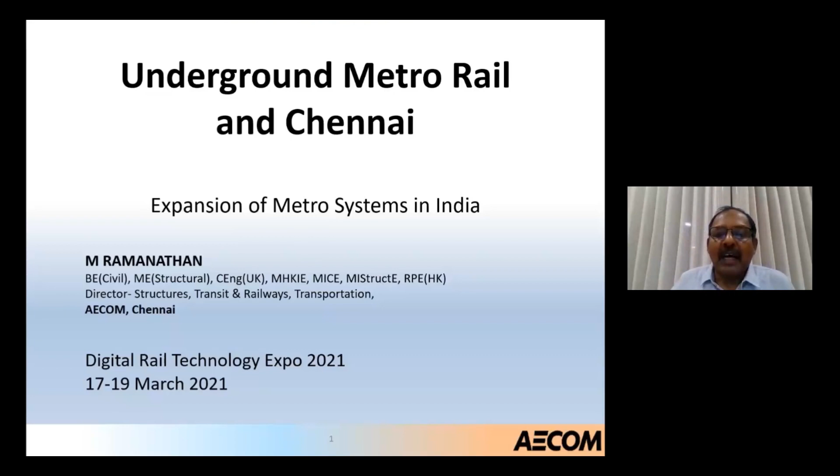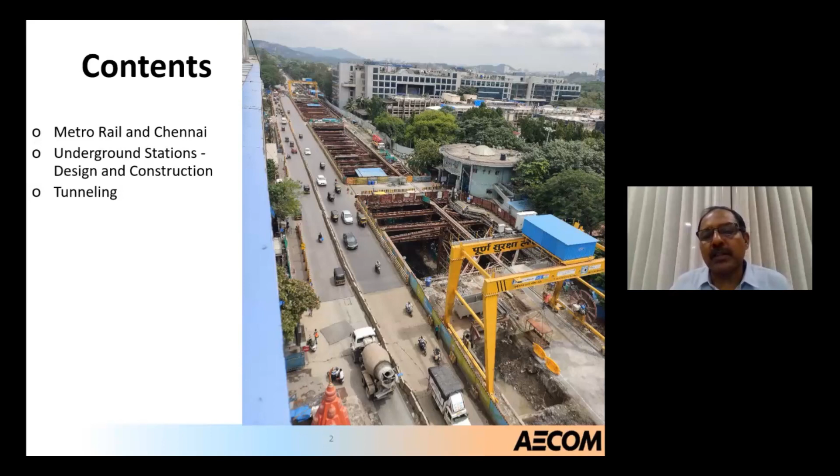I have divided today's presentation into three parts. The first part is about metro rail in general and the city of Chennai and its metro rail. The second part is underground stations, why we should go for underground, and what are the merits and demerits. The third part is tunnels. Underground metros have stations at regular distances of about 1 kilometer, connected by tunnels, so we'll talk about tunnels as well.

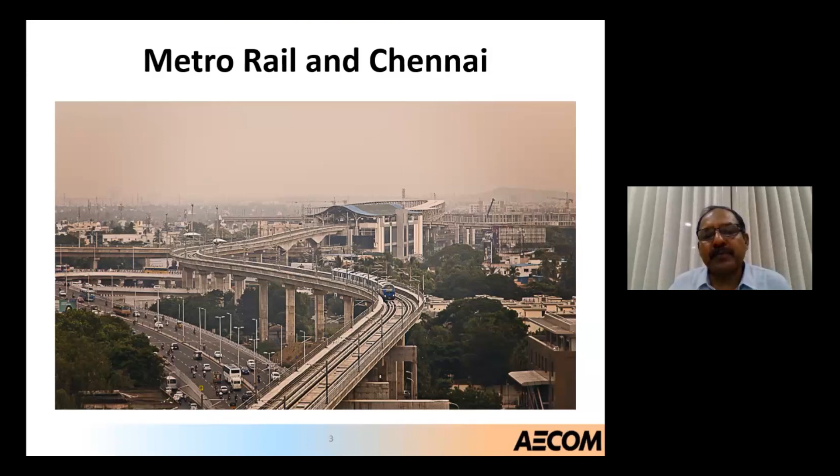The first part is metro rail and Chennai. Let us go through how metro rail is different from the normal intercity railways, since we have been using intercity or mainline railways for a very long time. But these metros have only picked up in the last 15 to 20 years in this country.

Let us brush up on the basic differences. The metro rail, by name, is clear it's only in metro cities, and it's used for mass transit. In Chennai, there are 4-car trains, as you see in this picture. A 4-car train is capable of transiting 1,276 commuters at a time, whereas even a bus in this city can take about 70 people, 40 seated and 30 standing. So you can imagine how many buses we would need to replace a single 4-car metro train. That is why it is used for mass transit.

Another feature is that the stations are located very close, normally 1 kilometer apart. The idea is that anyone along the alignment in the city, by walking not more than 500 meters, should be in a good position to board a train. In metro, we use standard gauge. Indian Railways were originally running on meter gauge, as the name indicates, where the distance between the two rails is 1 meter. This has been replaced by broad gauge now, which is more than 1.5 meters. The standard gauge is something between meter gauge and broad gauge; to be precise, it is 1435 millimeters.

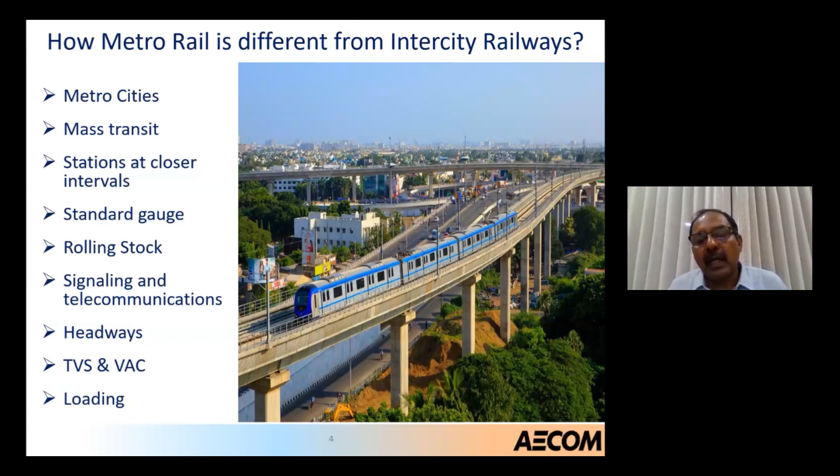Another aspect is TVS, or Tunnel Ventilation System, and the ventilation and air conditioning system. These are all new and specific for metro rail operations, and the loading of metro rail trains on the rails is also much different compared to broad gauge mainstream railway.

Now the merits of metro rail: it consumes very less energy and is more reliable. There will be no traffic jams, so it is punctual, has lesser noise level, and is very comfortable. Travel is in air-conditioned coaches, so the commuter will not be subjected to heat and other inconvenience, allowing him to go to his workplace in a good mood.

The capacity can also be augmented. For example, as seen in this picture taken from the Chennai Metro, it comprises 4 cars but has been designed for 6 cars. The stations, signaling, and telecommunication are all designed for 6 cars. Since these systems are designed for a long period, 120 years of design life, it can be augmented to 6 cars whenever required.

The journey time is reduced and it's faster, carbon emission is less, and it carries the same traffic as 7 lanes of buses and 22 lanes of private cars. So there are a lot of merits to going in for metro rail.

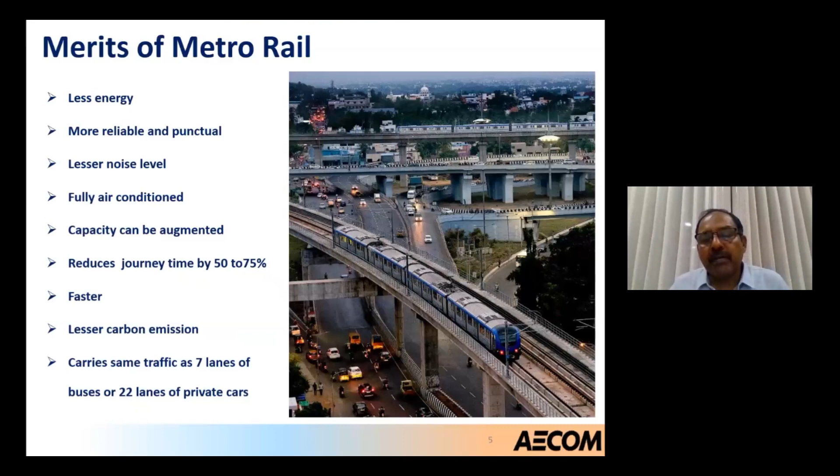Now coming to India, metro rail has been very popular all over the world, but in India it started very late. Actually, the Calcutta Metro started very early, as early as 1972, but the method of construction used was not very modern. It was an underground metro.

In those days, the communication and interface between various government agencies and utility companies were not very good, and all that delayed the Calcutta Metro, subjecting people to a lot of inconvenience. In 1984, after 12 years, they could complete and inaugurate only 3.5 kilometers of underground metro.

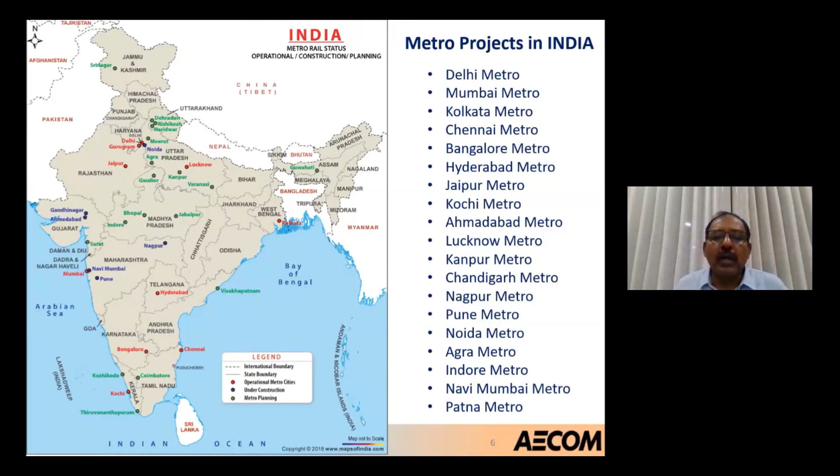Later, the Government of India and the Ministry of Urban Transport also allowed second-tier cities to have metros, and most of these second-tier cities went for elevated metros because that can be constructed very fast and is relatively cheaper than underground metro. So many second-tier cities — Kochi, Jaipur, Ahmedabad, Lucknow, Kanpur, Chandigarh, Nagpur, Pune, Noida, Agra, Indore, Patna — now have metro rail constructions going on. So the metro system has well taken off in our country.

This is a map of Chennai Metro.

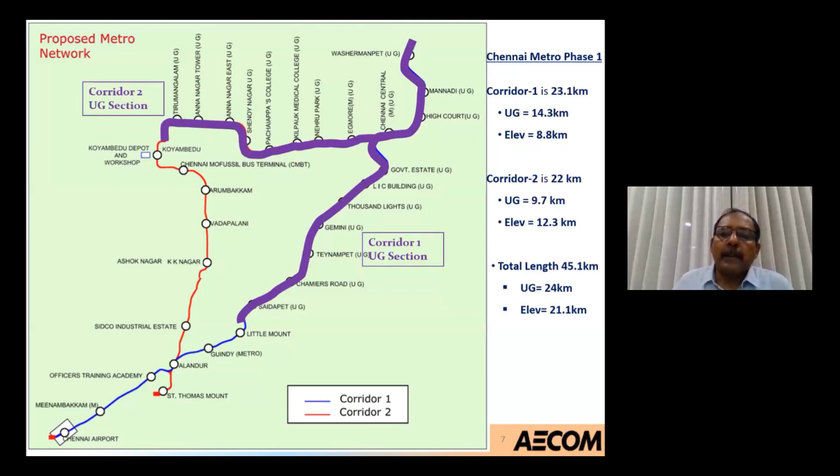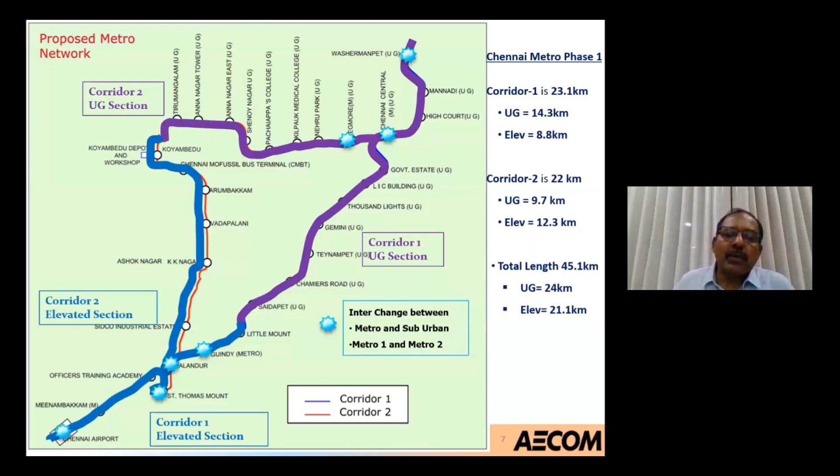I'm going into the details. This is the first phase, which commenced in 2009 and completed in 2016, but in between it's done in phases. So this total 45 kilometers, out of which nearly 50% is underground, shown in the shaded purple line, and the blue color is elevated. So there are two corridors.

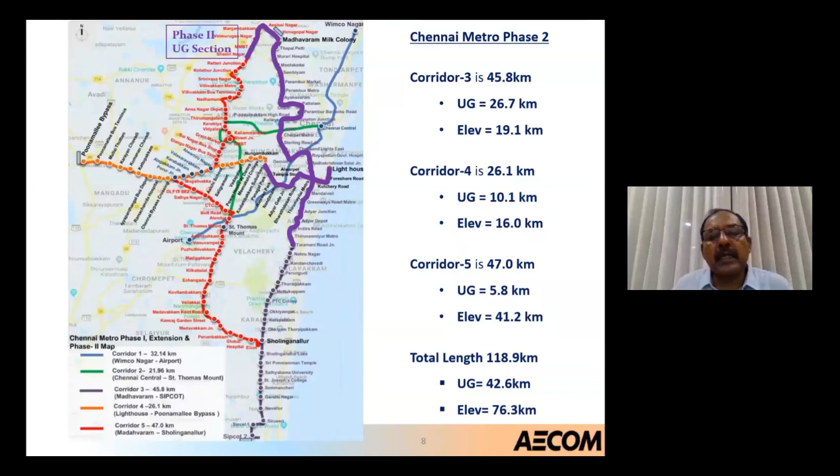So this total 119 kilometers has been divided into 17 civil tenders, and all the civil tenders have been launched. 2 of the tunnel tenders have already been opened, and the other 15 tenders have been launched. So what has now been shown in the purple thick highlighted color, one is the underground, and the remaining part is at different stages.

The detailed project report for phase 2 was completed in 2015. The geotechnical investigation, which the client themselves did, was a very expansive geotechnical investigation completed in 2018. The detailed design consultant, AECOM, is doing the entire corridor 3. The other consultants are doing corridor 4 and corridor 5, and AECOM is also doing part of corridor 4.

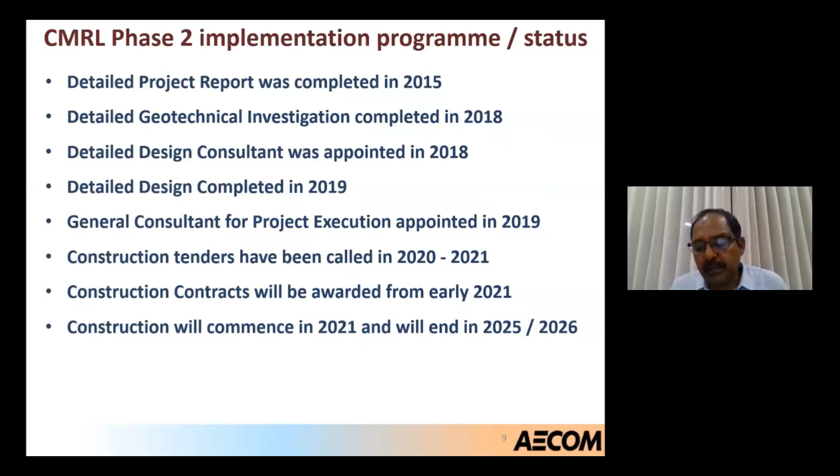So these are the detailed design consultants. They were appointed in 2018, and detailed design work was completed in 2019. A general consultant for project execution, that is construction supervision and contract management, was appointed in 2019. Tenders are floated in 2020 and 2021, construction contracts will be awarded starting from 2021, and the works will be completed in phases between 2025 and 2026.

Before going to the underground, I just want to show a 3D view of an elevated metro along OMR. What is OMR? It's Old Mahabalipuram Road, the road from the city which leads to the historical place called Mahabalipuram, where Prime Minister Modi and the Chinese President Xi Jinping met 2 years ago. So this is that road, a famous road of the city, called Old Mahabalipuram Road.

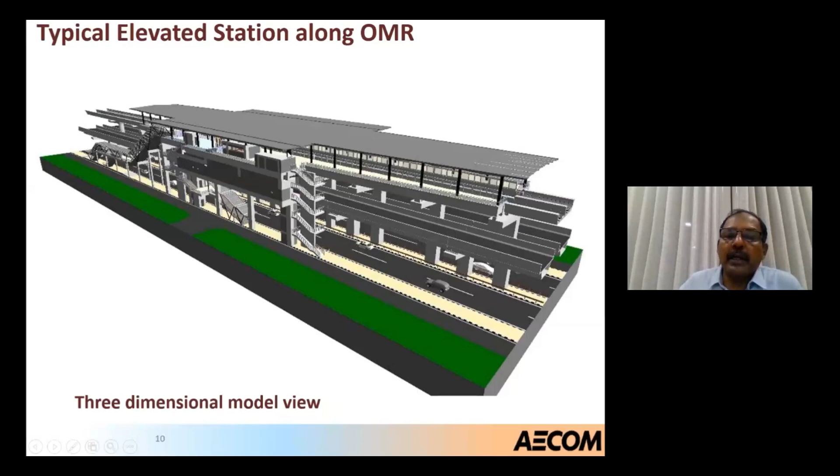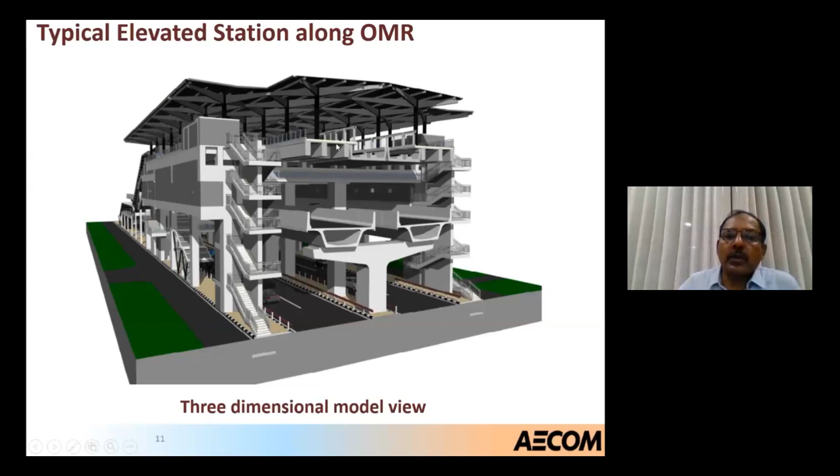You can see there is a viaduct below. This is a proposed elevated road, and the metro rail train will be running above. This is another cross section, a closer view. So this is the existing Old Mahabalipuram Road, now called Rajiv Gandhi Road, and this is the proposed elevated viaduct, and this is the station side platform. The platforms will be opposite to each other.

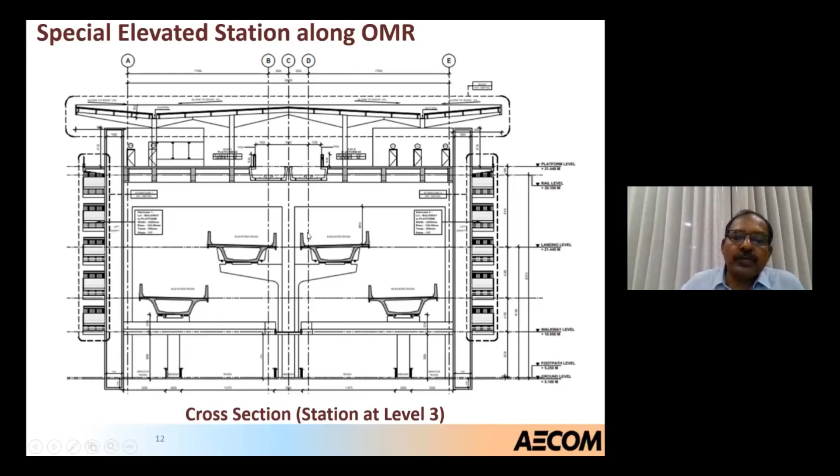And here is another place where there will be 2 decks of elevated viaducts. One elevated road and another one at a junction where there is going to be a flyover, and over which the stations are constructed. So all provisions, the station will go first, but provisions will be made for the elevated road, which will come later.

And now I go into the underground stations. So this is a typical underground station, where you can see a big box constructed below ground with tunnels on either side.

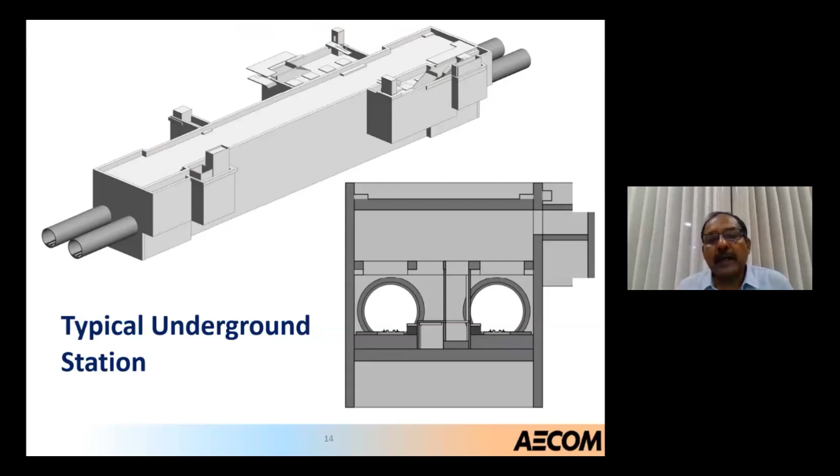So underground metros are there everywhere, all over the world. The London Metro, popularly known as Tube, is the first one, which started in 1863, and now it has more than 400 kilometers of metro, with nearly 270 stations, and on average 40 lakh journeys are performed every day. Paris Metro followed in 1900, New York Metro also in 1904. US is not very popular for public transport, but the city of New York has this subway, which is very popular, and it has the maximum number of stations all over the world, nearly 424 stations in New York. Tokyo Metro came in 1927.

Moscow, actually, it is a piece of what I would say - every station has been constructed so meticulously, like a museum, with a lot of heritage value.

Because of this communist policy and the Iron Curtain, many people did not know about the developments in Moscow for long. So anybody who gets an opportunity should visit Moscow Metro.

Beijing Metro started in 1969, and all over the world, there's a maximum number of people who use metro in Beijing, nearly 1 crore journeys per day.

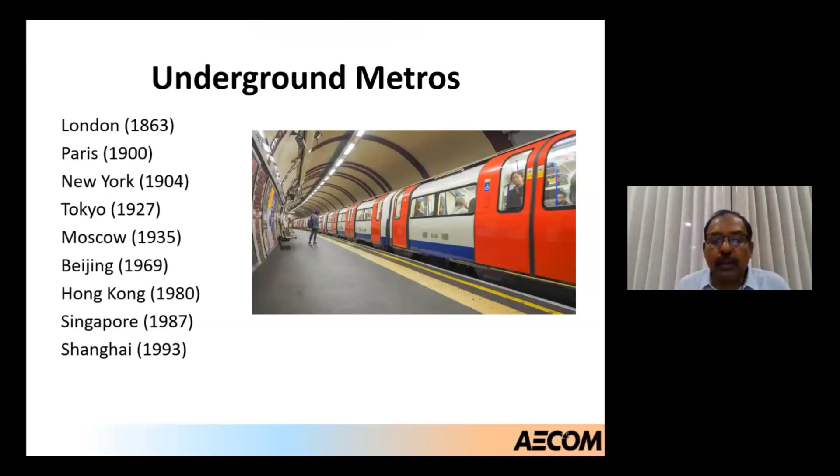Now, all over the world, people use underground metro. Why should they go for underground? As I said before, in India, most of the second-tier cities and even the first-tier cities go for elevated.

For economical reasons, the cost is less, and the inconvenience to city citizens or city dwellers at the time of construction is relatively less in elevated metro. Underground is a bit of a nuisance during construction, and it is expensive and takes longer time. So that is why our people mostly go for elevated.

But why do all the major cities all over the world go for underground? Because the underground metro is more sustainable. It does not damage the configuration and the landscape of the city.

I can compare the Mount Road of Madras or Chennai and the MG Road of Bangalore. Now MG Road of Bangalore has an elevated metro, meaning the landscape of the city along MG Road has totally changed. You have an eyesore sort of viaduct in the middle of a very important road of the city. Whereas on Anna Salai or Mount Road of Chennai city, which is the lifeline of the city, all the metro stations are below ground, underground.

So whatever structures, road width, commutation, passengers, all the heritage structures are preserved, because it is a city with a lot of history.

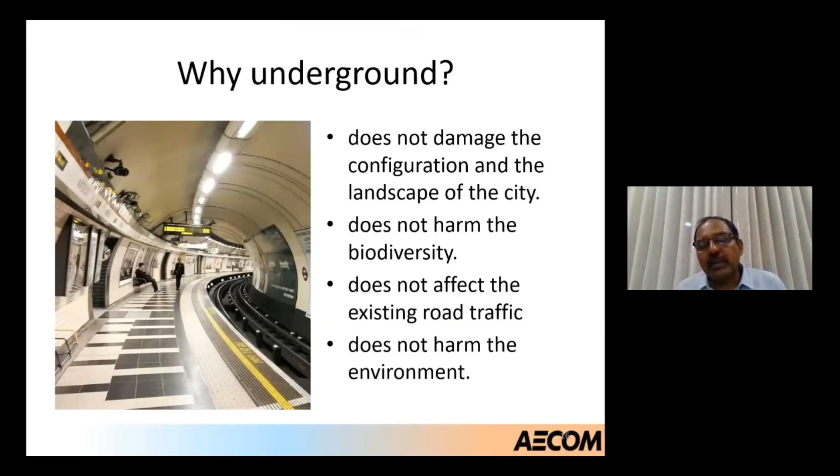Otherwise, they would have been traveling in buses or cars or scooters above the road. So all their carbon emission is now saved. Since they go below ground, it is not harming the environment. These are the broad advantages of underground.

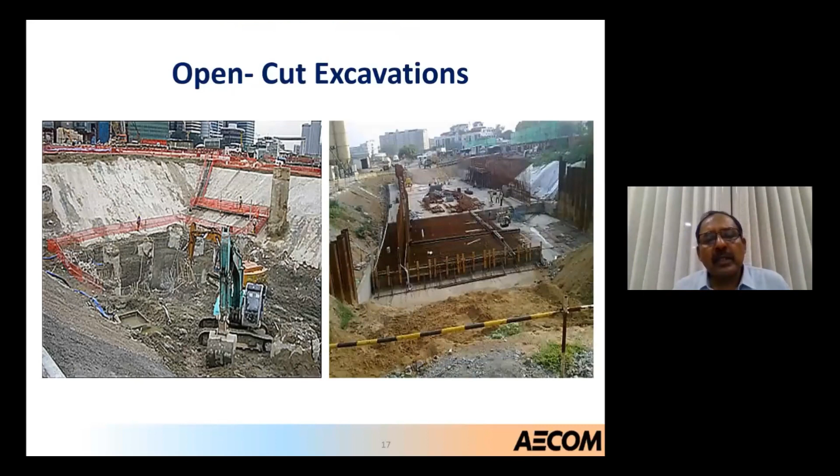Now I'll quickly go into the construction techniques. Underground, if the soil is good, you can go for open excavation, but not in many places. In places where the soil is loose, you have to use some shoring system or other system. A shoring system is a temporary vertical support to support the excavation.

In places like Delhi, in the top portion you don't need any shoring, but below you do. Mumbai is also the same. In places like the Middle East, the soil is such that you don't need anything at all, you can just go down 25, 30 meters without any problem. But in Chennai city it's not very advantageous that way.

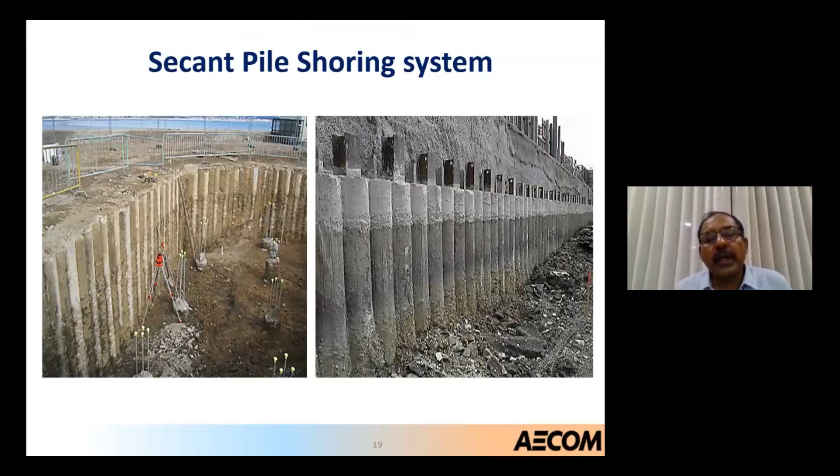So we use something called a diaphragm wall, because the water table is very high. It is not economical to use a temporary shoring system. It can be used, but instead, a diaphragm wall, which is a concrete wall, is constructed.

It is constructed by something like a bore pile, by pouring concrete from the top. It will be used as a temporary support during the construction stage, where you see a lot of steel struts longitudinally and in the transverse directions.

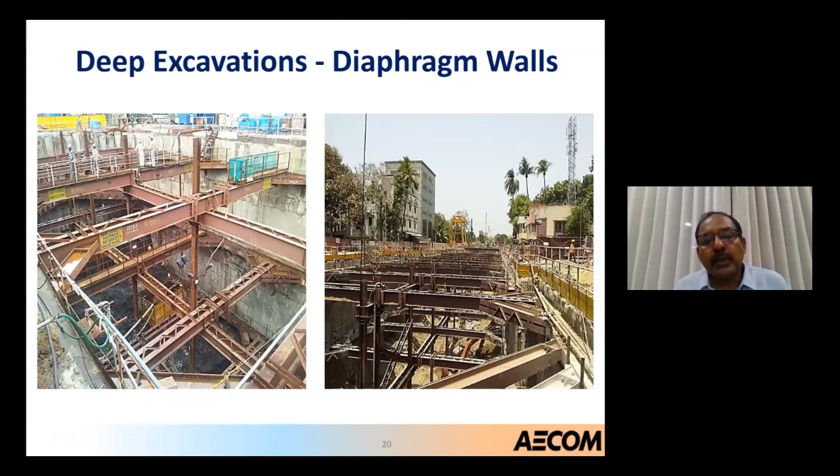But once these are all removed, this diaphragm wall, which is built for temporary use, will become a permanent support. Here is another view of the diaphragm wall, where you can see the steel struts.

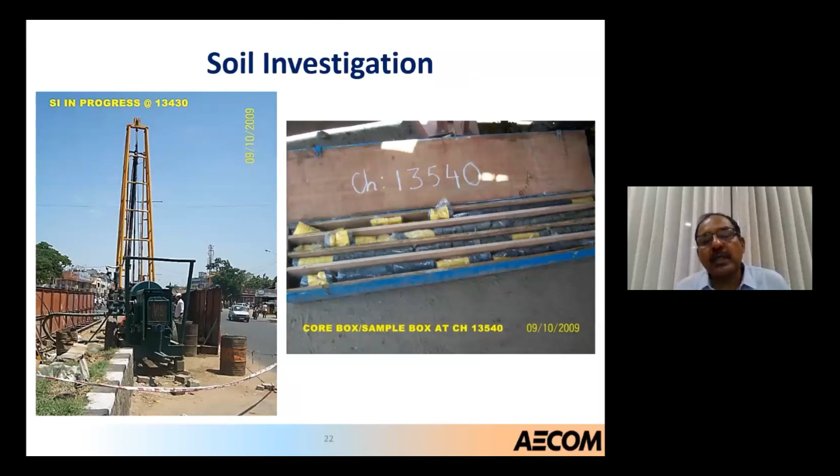We have to do an extensive soil investigation to understand the soil conditions, go 30 meters, 40 meters below ground, take samples, and geologically design your diaphragm wall and the bore tunnels. That is a very important part of underground construction.

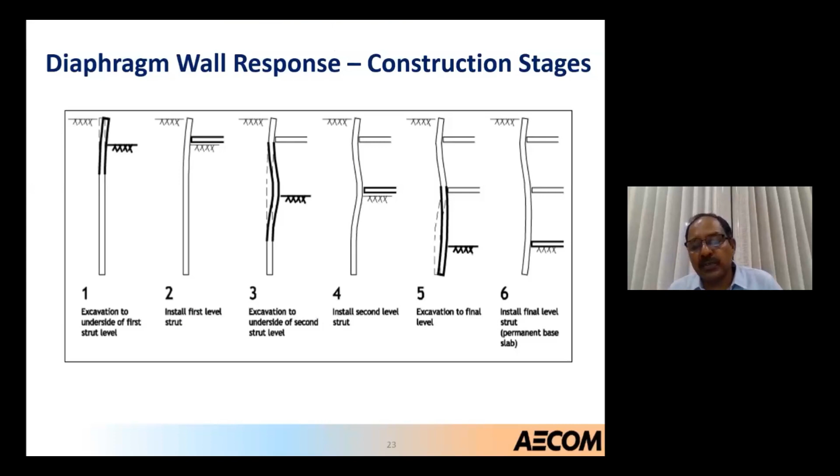As you can see, the performance of this wall - this is all exaggerated, the deflected shape - but every single stage is not the same, meaning the designer has a big problem. There is no one single condition. If you construct a simple building with walls, slabs and beams, you know the maximum shear force and maximum bending moment - there is only one case, the maximum load case. But that is not the case with a diaphragm wall or retaining wall, especially in deep underground structures. Every single stage, the performance is different, and you have to check every stage, and design it to withstand all pressures for all stages.

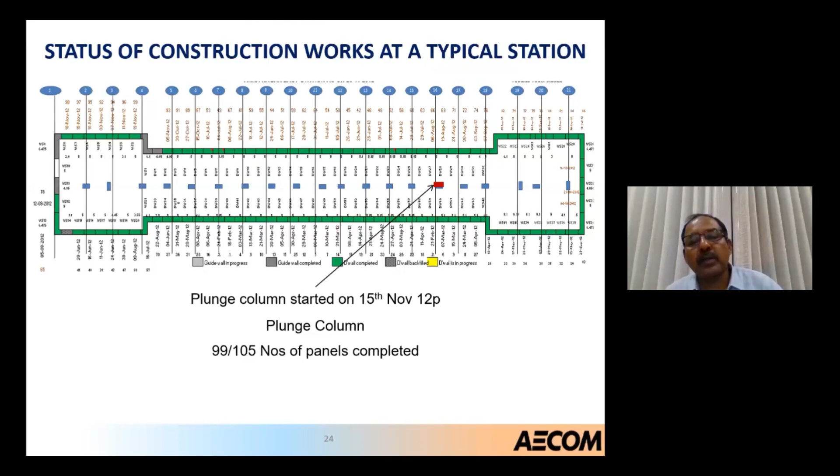So this is a plan taken from one of the metro stations in the city of Chennai. What is shown in green color is the diaphragm wall, and what is shown in blue color is a column in between. This is a plan view.

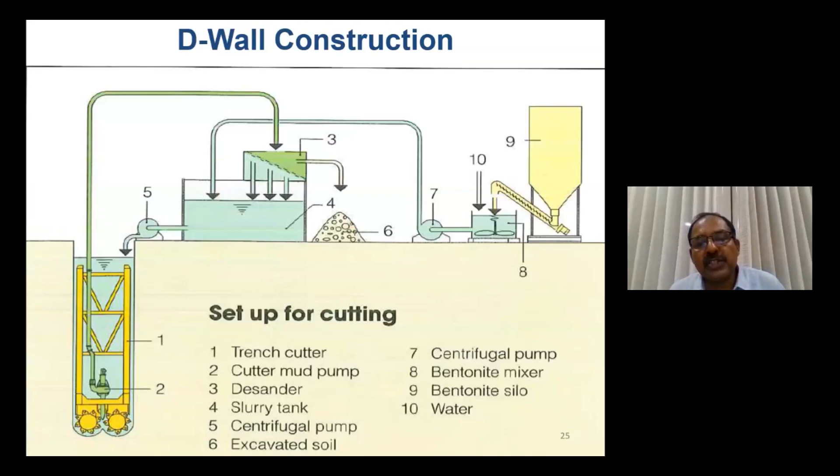This is how the D-wall is constructed, the diaphragm wall, shown in 1 and 2. I have taken this from a brochure of a trench cutter manufacturer. The trench is cut, and a temporary solution called bentonite is filled in. That will hold the excavation temporarily, during which you insert the rebars or reinforcement and also the concrete. This is a very elaborate process, and not many contractors can do it. You need a lot of equipment, and specialization, to do this diaphragm wall.

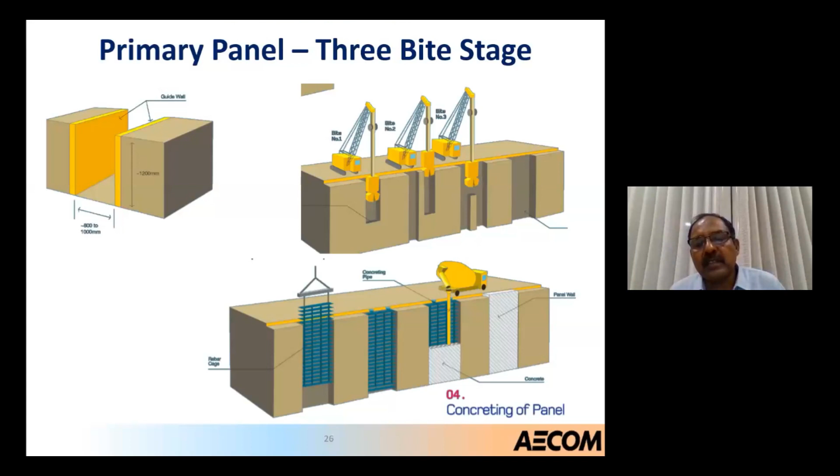These are some more cartoons showing how it is done. It is all cut into small pieces. The first one shows a guide wall, and the second shows it cut into 3 bites, with reinforcement after the 3 bites. You hold for the entire thing, normally about 1.5 meters to 1.8 meters, and the rebar reinforcement is inserted, and concrete is poured.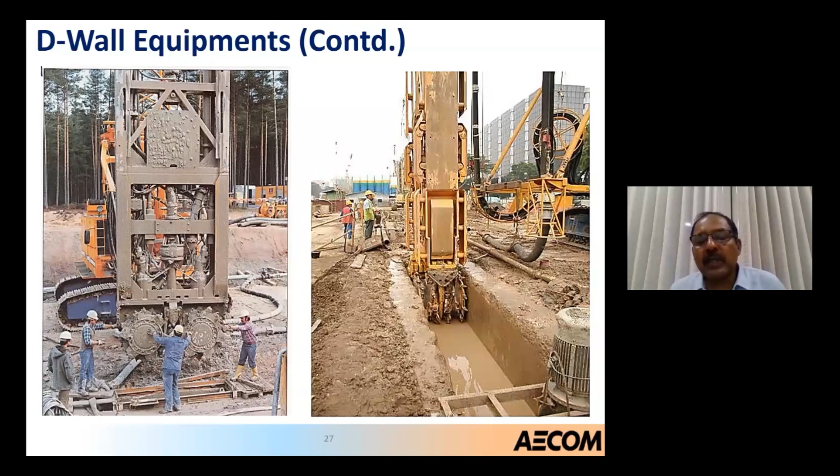So these are the pictures. What you see on the left side is the trench cutter, and on the right side is what I talked about, the guide wall. It's just going down, and this is a reinforcement cage of a diaphragm wall. What you see, the planks at 3 levels, is for the 3 stages, 3 slabs - the top slab and the concourse slab where the commuters will be coming and buying tickets, and then going down to the platform level where the trains are there.

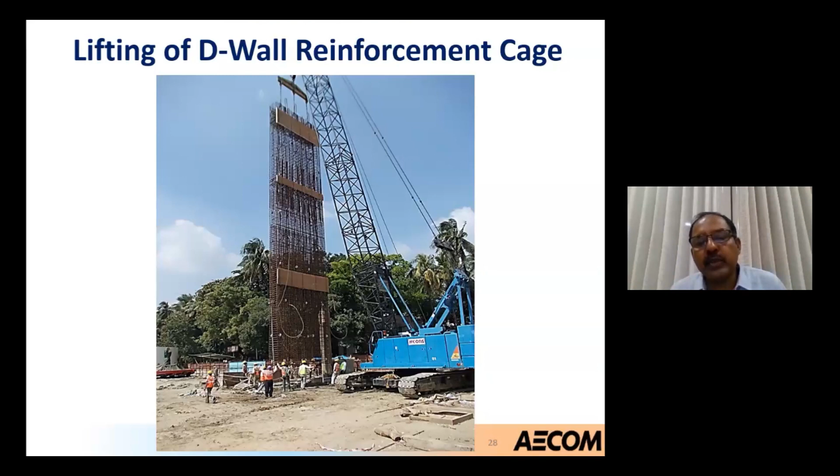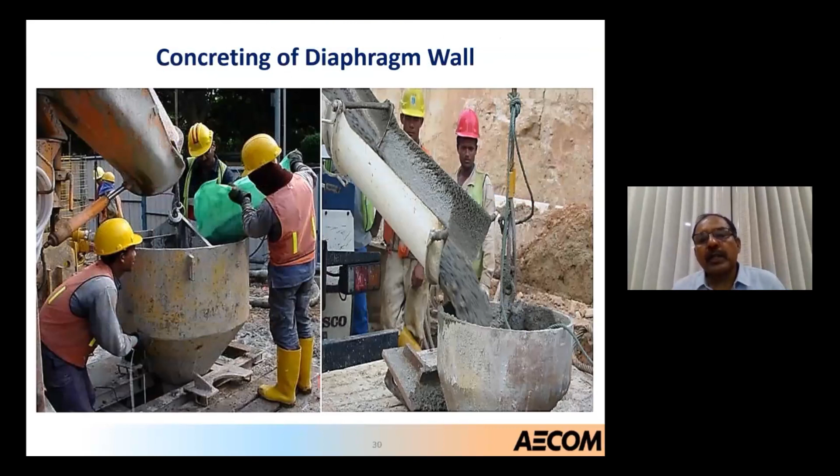So all these 3 levels, you have to put the rebars to the couplers for the slabs to connect. It's a close-up view - the reinforcement is pushed in, and this is concreting. So this is how a diaphragm wall is constructed, and this is a photo taken during construction of the Chennai Central Station, a 4-level station, a very complicated station.

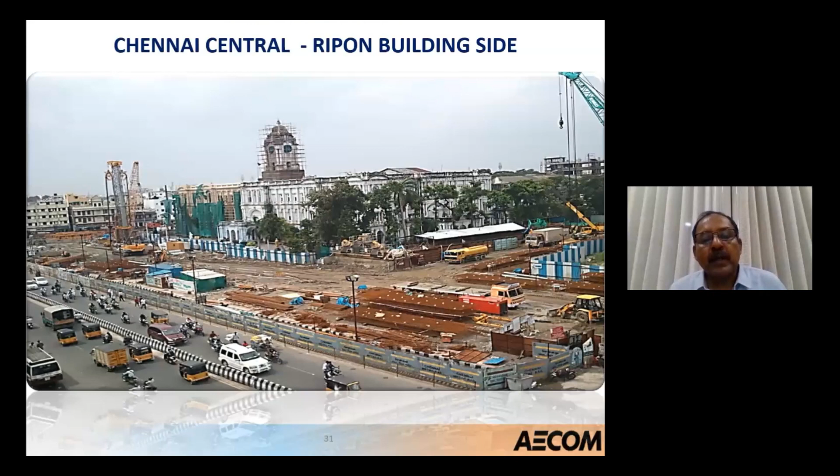And I was talking about the heritage building - what you see on the right-hand side in white color is the Ripon building, more than a hundred years old. Some renovation work was also going on at the same time. You can see all the reinforcement bars left out, and the traffic has been diverted. Part of the road has been taken by the contractor for construction, whereas the remaining part, the traffic is going on. This is what I call the disturbance or nuisance to the public during construction. There is a lot of utilities to be diverted, a lot of traffic to be diverted. But once you construct it, the station will go below ground and it will last for 120 years.

So the first slab will be cast first, second slab next, and the third slab later. This is called top-down. There is also another method called bottom-up, where we excavate everything down and build from the bottom.

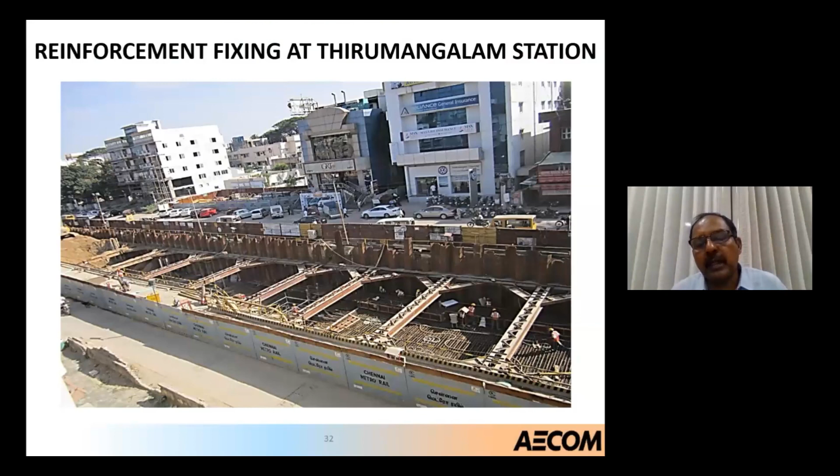Very quickly, I'll go through the bore tunnels. These are tunnels connecting the two stations. Normally these twin tunnels are 14 meters apart and average 6 meter diameter, to be precise maybe 5.8 or 5.7 meters. It was a big thing when it started in 2000, but now after 20 years, Indian contractors and engineers are very familiar with bore tunnels.

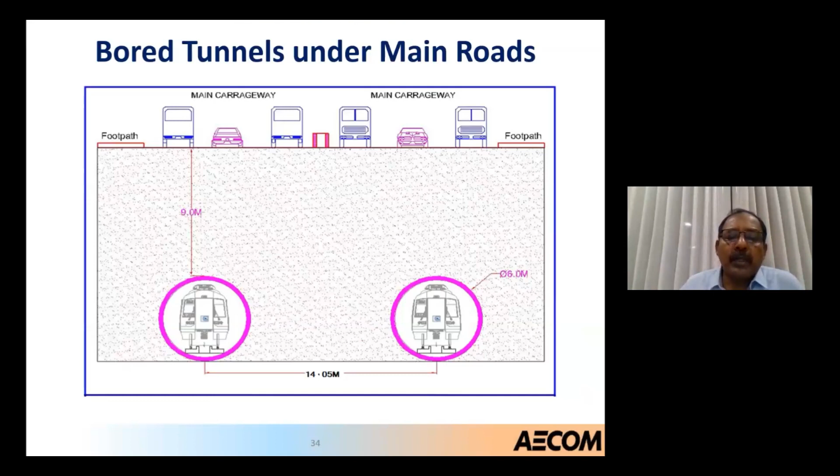It is normally 1.5 times the diameter below ground, that's about 9 meters for a 6 meter tunnel. But if the situation warrants, it can also be shallower, though you have to treat the ground.

This tunnel is showing what we call technically space proofing. That is, everything will fit into it, and the train should not touch the kinematic envelope all around. All the cables, ducts, drainage, rail support things, track forms, everything will be accommodated within this 5.8 meter or 6 meter diameter tunnel.

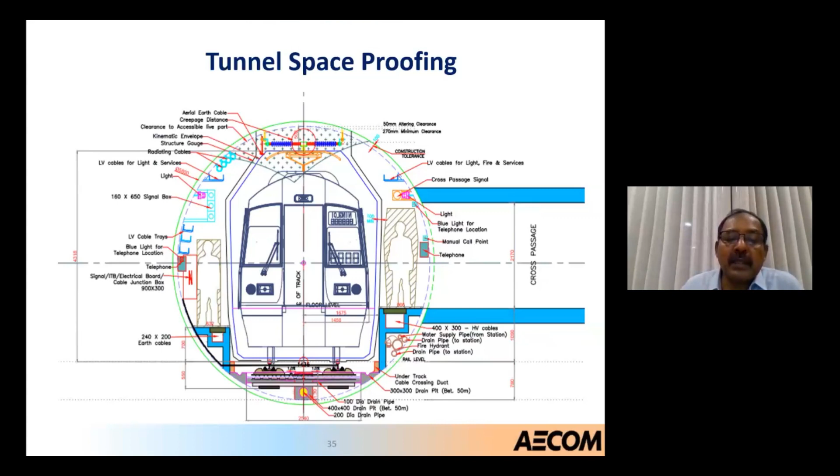So how is this bored? This is called a closed face TBM, tunnel boring machine. This machine bores through and it is closed in the front.

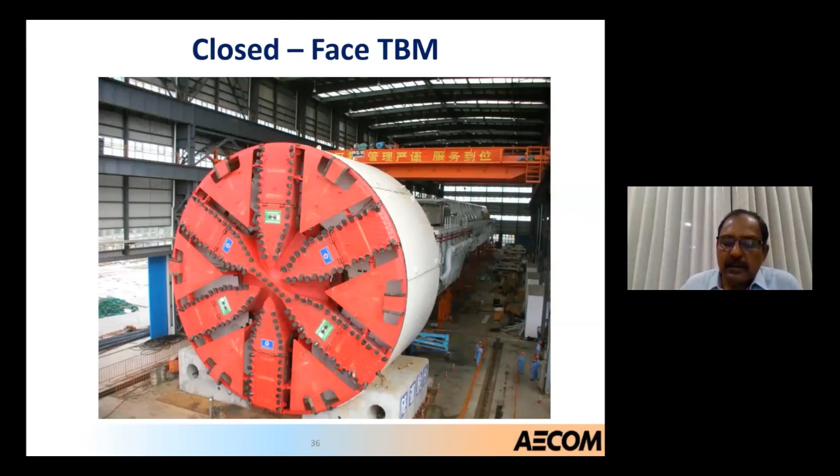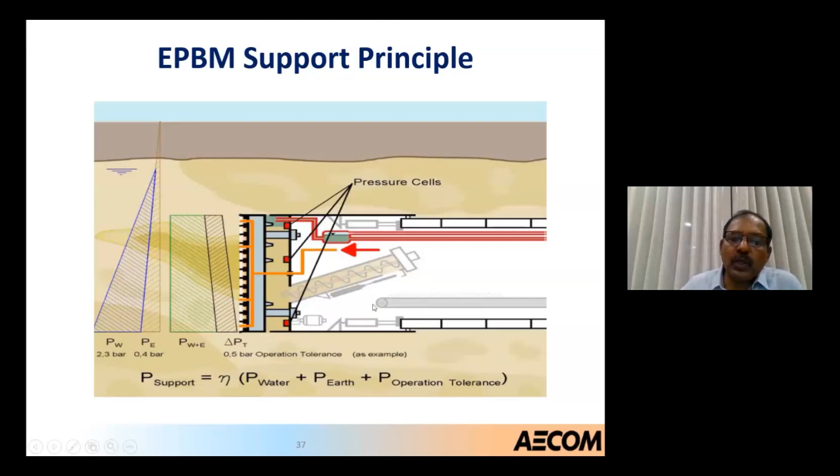Inside, there is a screw conveyor. There will be a lot of pressure on one side, shown in blue or green color. This is the water table, so there's water pressure, and there's soil pressure as well, all acting against the machine. From inside, the machine gives an equal and opposite pressure to withstand this pressure, and it rolls around while the soil is excavated and taken through the screw conveyor back to the tail of the tunnel boring machine.

This is a clearer cross section showing the front face. The screw conveyor takes the soil or earth out, which is first stored in this chamber and then taken inside.

These are the segment linings, the concrete segments you see here. The entire circle is normally divided into 6 pieces, with different sizes of segments, which are all brought and fixed in position. The machine does everything.

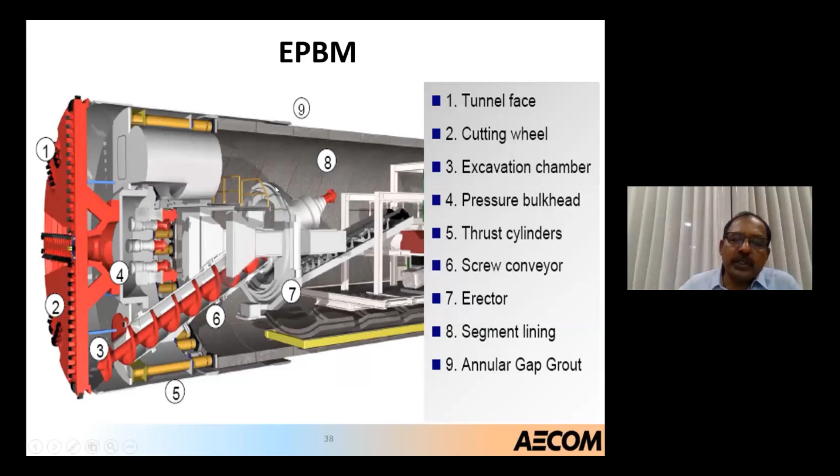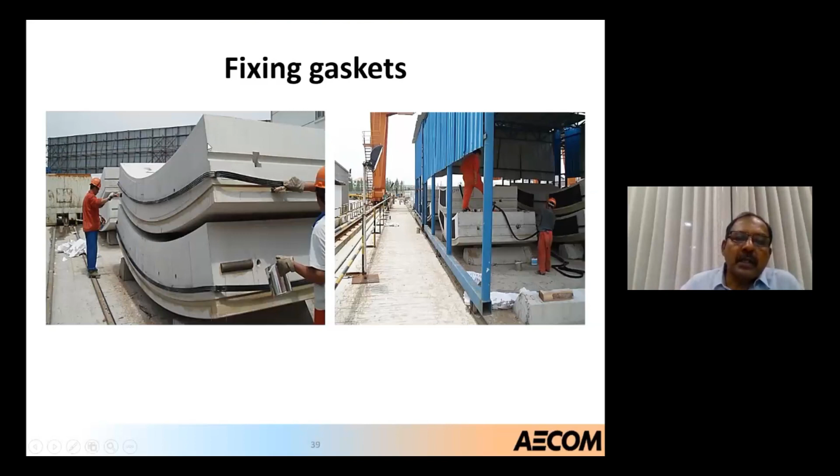This is a gasket for all these joints to be connected. You can see the finish of this tunnel, the tunnel segments. This is a photo taken from a stacking yard.

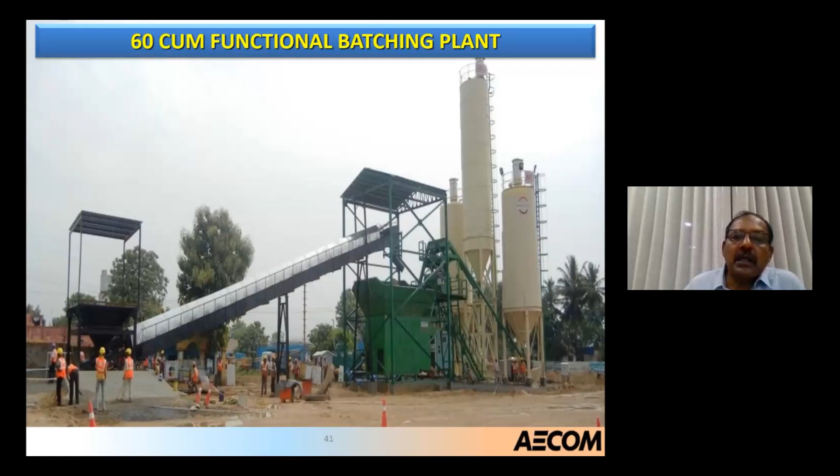A very big area is required where the concrete is prepared and the segments are cast. This is a batching plant within the casting yard, and this is where the segments are cast. These molds are very expensive, and you can see the rebars inside as concrete is poured into different sizes of molds. All the segments put together will form a circle.

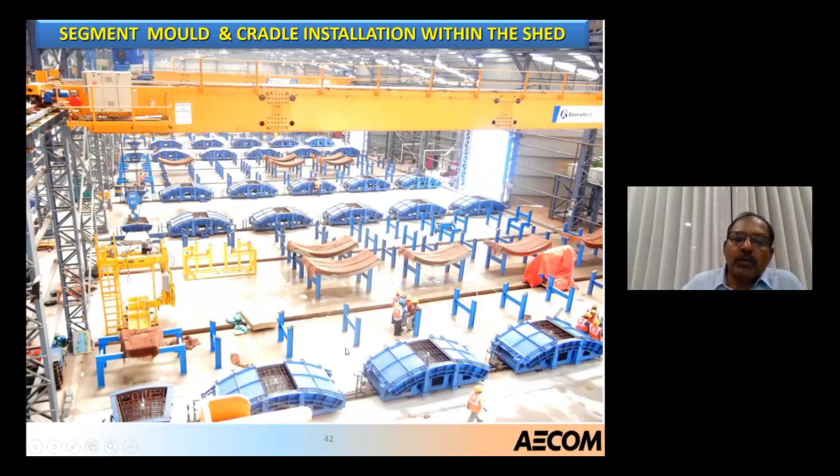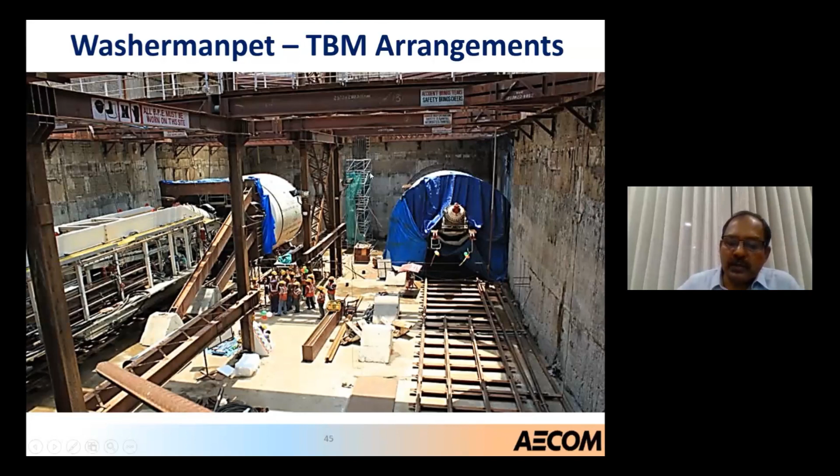This is the tunnel boring machine. From here it will start working, piercing through the wall and going out of the station box. From one station it will start, and at another station it will break through and come in, then again start from the next station to the following one.

So the tunnel boring exercise, India has practiced very well, and now there are a lot of Indian contractors and engineers who are very familiar with it. It has been in operation for nearly 20 years in this country.

So the underground metro, we have come to the end of the presentation. There is a lot of inconvenience during construction, but compared to elevated metro, it is more sustainable. India is very well taken off, and a lot of cities have already started working on metro, but most of them are elevated. I wish a day will come when future metros will be built more underground.

Wherever the city has not developed, in the suburbs where you have a lot of land, like the picture I showed of OMR in Chennai, a very wide 40-meter road, you can go for elevated metro. But wherever the streets are narrow, or wherever it has heritage value, or wherever you don't want to touch the configuration of road traffic, it is always better to go for underground metro.